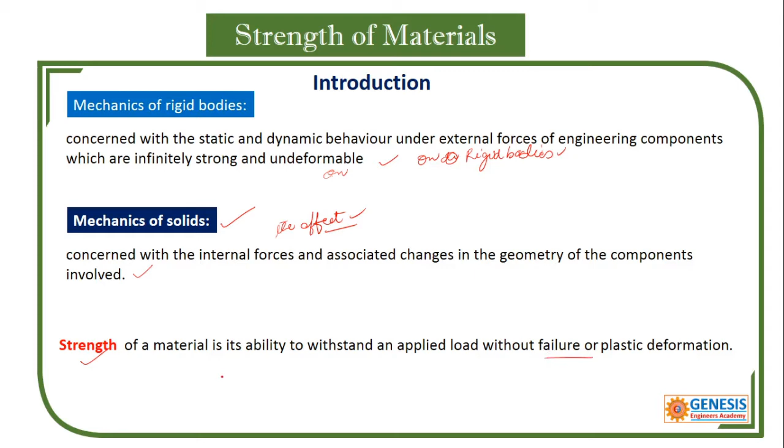Okay. So, in this we come across what is called strength. Strength is nothing but the ability of the material to withstand the applied load against failure or plastic deformation, whatever may be the case. So, next we'll go for what is that internal resistance. So, what is stress? Stress is the internal resistance offered by a body to the external load applied, per unit cross-sectional area.

What does it mean? So, if we apply a load on this bar, it undergoes deformation. When it undergoes deformation, the resistance opposing the deformation will be induced within the material. So, the stress is because of the external load and the deformation. To prevent that deformation, the material will offer internal resistance.

That internal resistance is due to the inherent capacity or capability of the material. When you don't have the strength, it is obvious you are unable to oppose. So, the stress is related to the capability of the material. So, what is stress? It is the internal resistance against deformation. Next, the stress is nothing but the load applied divided by cross-sectional area. That is the formula.

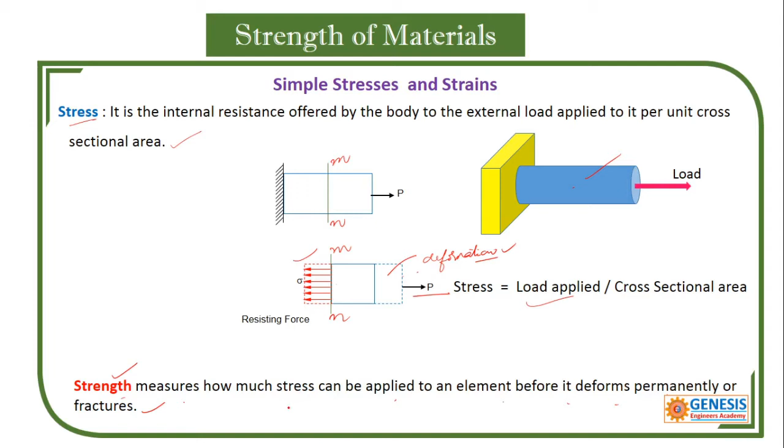Next I wanted to mention two terms: the longitudinal axis and the transverse axis. Take a prismatic bar, where the top and bottom have the same cross section. The line joining their centers of gravity we call the longitudinal axis. And the axis perpendicular to the longitudinal axis, we call the transverse axis.

If the load is acting exactly at the center of gravity, or along the longitudinal axis, then we call it a bar. If the load is acting in the transverse direction, we call that member a beam. So when a beam is subjected to a load, you cannot assume the load is acting axially; it is acting transversely. You need this clarification while studying the behavior of deformable bodies.

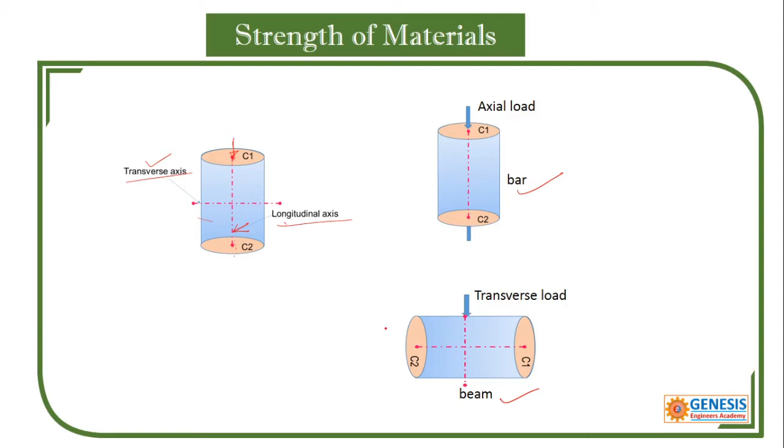Next one is types of stresses. So basically we have only two stresses.

Broadly we have two stresses. One is called normal stress. The other one is called tangential stress, also called shear stress. The normal stress is represented by sigma and the tangential stress is represented or designated by tau. Again, under normal stresses, the basic stresses are compressive stress and tensile stress.

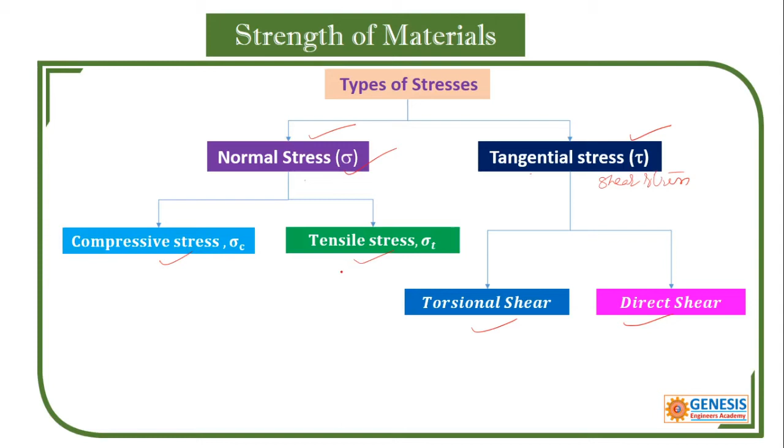Under tangential or shear stress, there are direct shear and torsional shear. So shear stresses are two types. One is called direct, the other one is called torsional. And the normal stresses are two types basically, that is compressive stress and tensile stress. Okay, so next, normal stress.

When do you call a stress induced in the body a normal stress? Normal stress is induced due to the normal load. So your application of the load must be perpendicular to the cross section. Normal is nothing but perpendicular, that is 90. So the line of action of the load and the cross sectional line must be at 90 degrees. Then only we can call it a normal stress.

So the load is always perpendicular to the cross section and the stress is nothing but resisting force. That resisting force is equal to P. So there is an equilibrium, right? And this is called original cross sectional area. So its units: the unit of a load is Newton. The unit of area is meter square in SI. So this is equal to Pascal.

Next one is, there are so many units we use to represent a stress induced in the body. 1 kilopascal is equal to 10 to the power of 3 Pascal, 1 megapascal is equal to 10 to the power of 6 Pascal, and 1 gigapascal is equal to 10 to the power of 9 Pascal.

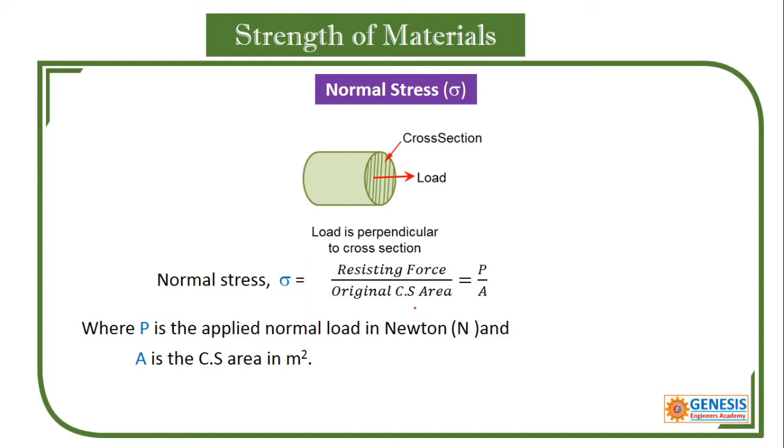Therefore 1 Newton per mm square is equal to 1 Newton by 10 to the power of minus 6 meter square. That becomes 10 to the power of 6 Newton per meter square, and this I can call 1 MPa. Sometimes you will be given this and you need to convert into Newton per mm square. 1 MPa is equal to 1 Newton per mm square. So take care of this one. That is about normal stress.

As I said, the normal stresses basically consist of tensile stress. Because it is normal, we use sigma, and the T suffix is used for tensile. Tensile stress means it elongates the rod or any structural member. So there is a stretching. That stretching is a small deformation, delta L, very small, which we cannot observe initially. That is why it is an infinitesimal elongation, but still it is a deformation. So this is about tensile stress.

What is meant by tensile load? If the load is able to stretch or elongate any body, we call it a tensile load. The stress induced due to tensile load we call tensile stress. And when you hear tensile, that means elongation: length is increased, diameter is increased, thickness is increased, height is increased, whatever the dimension. That is about tensile stress. Its formula is also P by A, and the unit we use is Pa. And this Pa is not small.

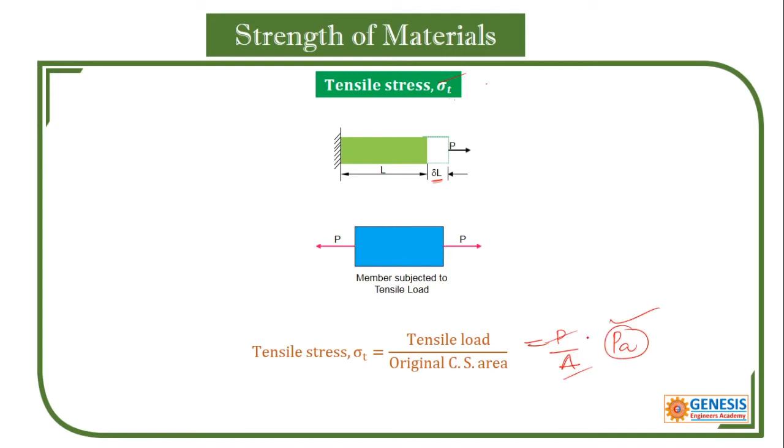This is the unit. This is the formula. Okay. Next one is compressive stress. So the compressive stress, when do you call this compressive? If it is able to shorten or decrease any dimension, then we call the load a compressive load, and the stress induced we call compressive stress, and that is compressive load by original cross-sectional area. Don't forget about original, because there will be another stress. That is why you always concentrate on the word original, meaning always constant. Okay, there is another area called instantaneous area, so that will come in other stresses.

So units are the same. If it is a stress, units are the same. Okay, any type of stress. Next, what would happen to this? See this one. This one shortens. So initially this is length L and it becomes L minus delta L.

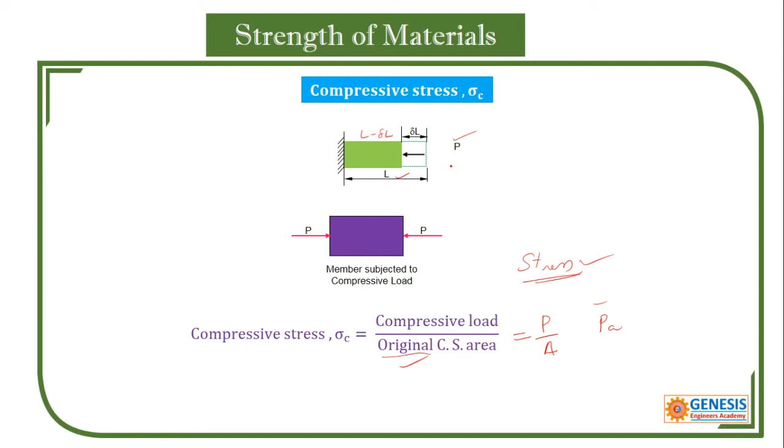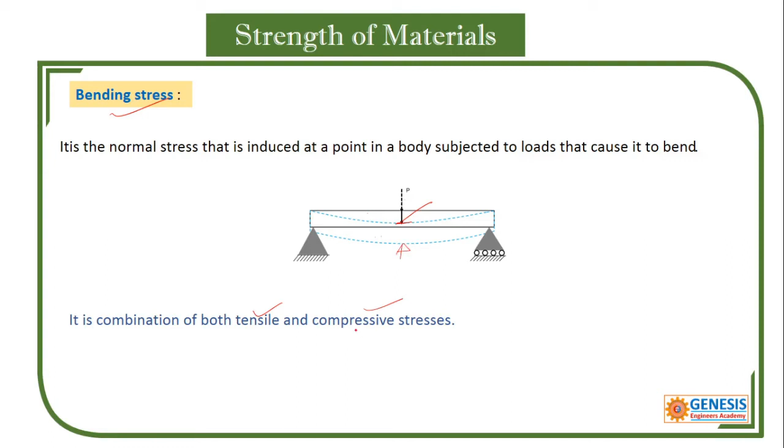Okay, so next one is called bending stress, and this also we come across in our future studies. That is basically a combination of tensile and compressive. Because of this load, the rod is under bending, and the upper layer will be subjected to compressive load, and the lower layer is subjected to tensile. So bending can be taken as a composite or combination of tensile and compressive.

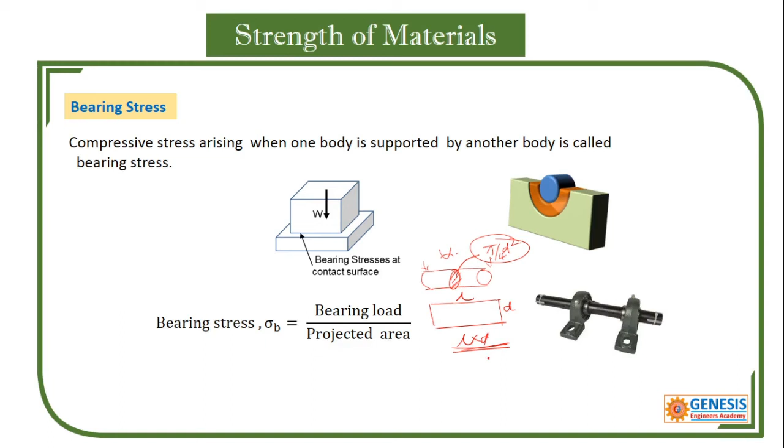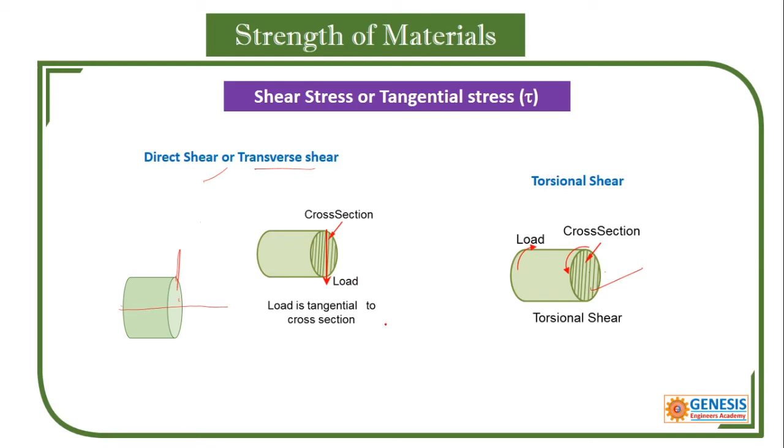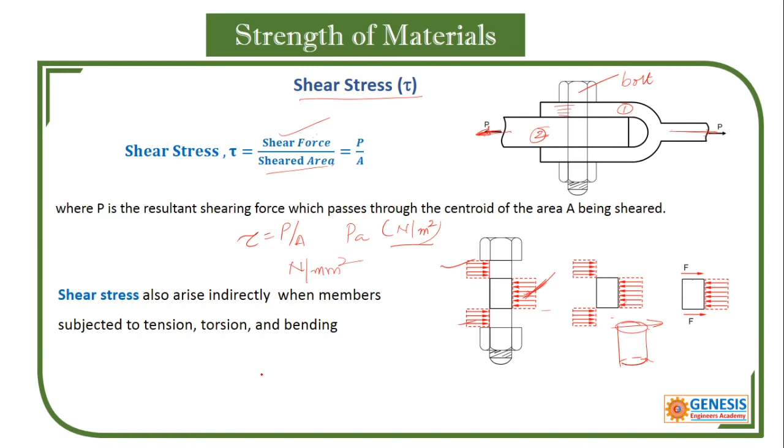You got my point? So this is about shear stress, and the formula is the same, that is tau is equal to P by A. Units are the same, Pascal, that is Newton per meter square. If needed, you must be able to convert one form into another form. The standard is this one, and a very useful one is Newton per mm square. Okay, so that is about shear stress. Now we move on to strains.

So normal strain means the load is applied perpendicular, and if there is an extension or deformation, we call it, in a common word, change in dimension by original dimension. The dimension may be length, height, thickness, diameter, whatever you want to mention. So in this one, what do you call strain? There is a deformation delta L. So deformation is equal to delta L. The length is increased to L plus delta L because of this delta L. So the change in dimension.

The change in dimension means final dimension minus initial dimension. Final dimension is L plus delta L. Initial dimension is L, divided by the original dimension. This gets cancelled and you will have delta L by L. So that is about strain. Because the unit of change in length, a small deformation, is meter, and this length is also meter, or mm by mm, they get cancelled, so the strain will have no dimension.

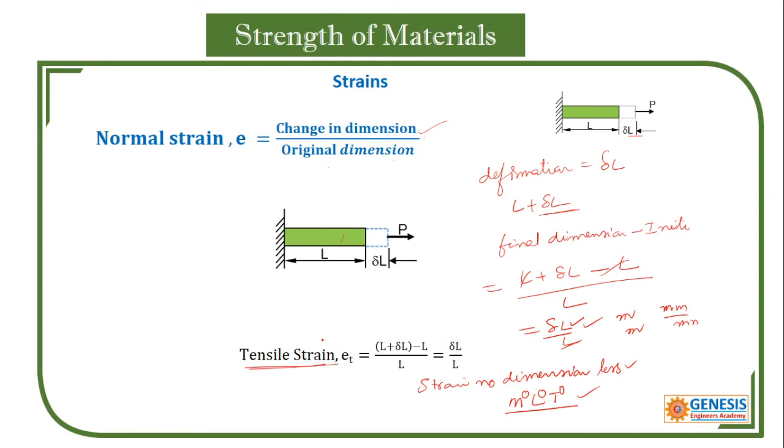It is dimensionless. Dimensionless means M0, L0, T0. Now this is called tensile. Tensile strain means it is a tensile load. That means it extends, it elongates, it stretches. Next one is called compressive strain. Initially the load is here. Because of the load, there is a compression, that is a contraction, also called delta L. Initially the length is L and it has been reduced to L minus delta L. So the final dimension is L minus delta L and the initial dimension is L, by original. We have minus delta L by L.

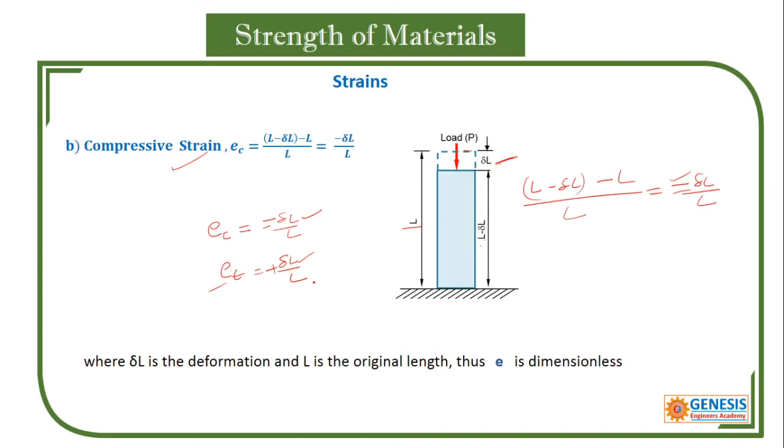This indicates that the length is decreased, diameter is decreased, thickness is decreased. So you can use any one of them. To differentiate from tensile, compressive strain is shown like this, minus delta L by L. If it is shown like this one, it is delta L by L, and it is positive. Why? Because there is an increment. This is negative. Why? Because there is a shrinkage, contraction. Got my point? So this is all about compressive strain and tensile strain.